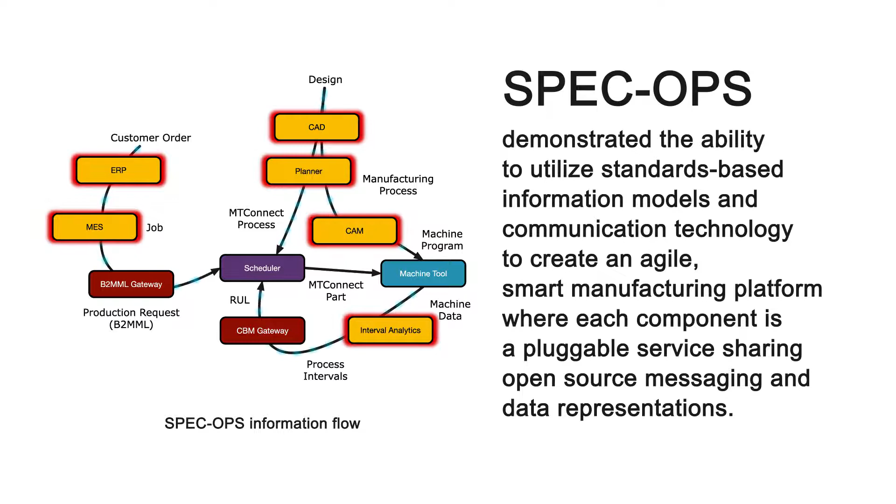utilize standards-based information models and communication technology to create an agile, smart manufacturing platform where each component is a pluggable service sharing open-source messaging and data representations.

Current enterprise resource planning, or ERP, and manufacturing execution software, or MES, provides little to no support for dynamic planning, scheduling, and optimizing equipment utilization. Nor does it support the needs of contract manufacturers as the industry moves towards flexible, agile design and manufacturing services to accommodate a wider variety of customer requirements.

To address the needs of modern manufacturers, the SPEC-OPS team has developed technologies that demonstrate dynamic planning, scheduling, and process analysis to increase agility on the shop floor. The SPEC-OPS standards-based approach uses standards for all communications and information sharing between the various services to allow for pluggable components and a scalable architecture not possible in a vertically integrated proprietary platform.

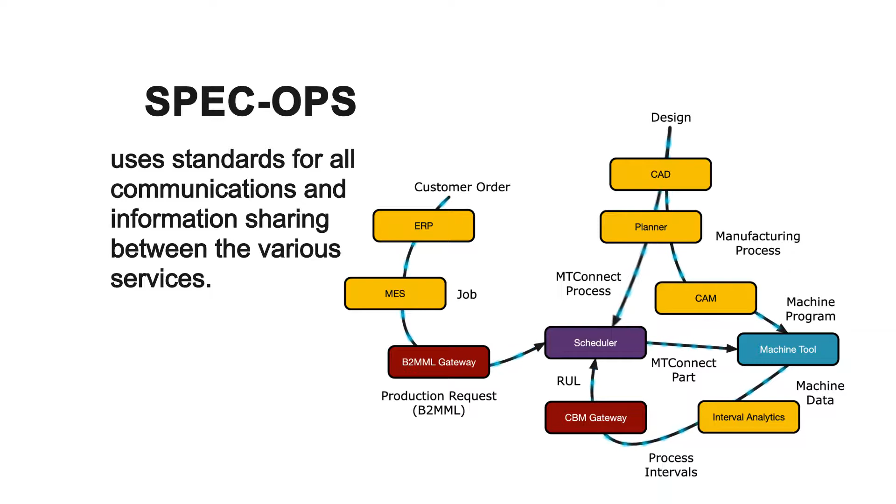SPEC-OPS provides the foundations for manufacturing systems to become self-aware. It allows these systems to dynamically describe themselves and their capabilities, and then track their capabilities during production with real-time feedback to planning and scheduling.

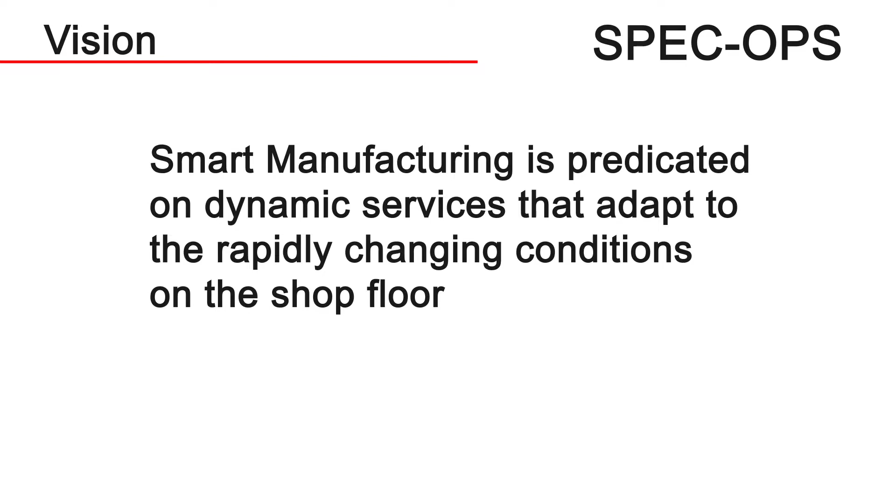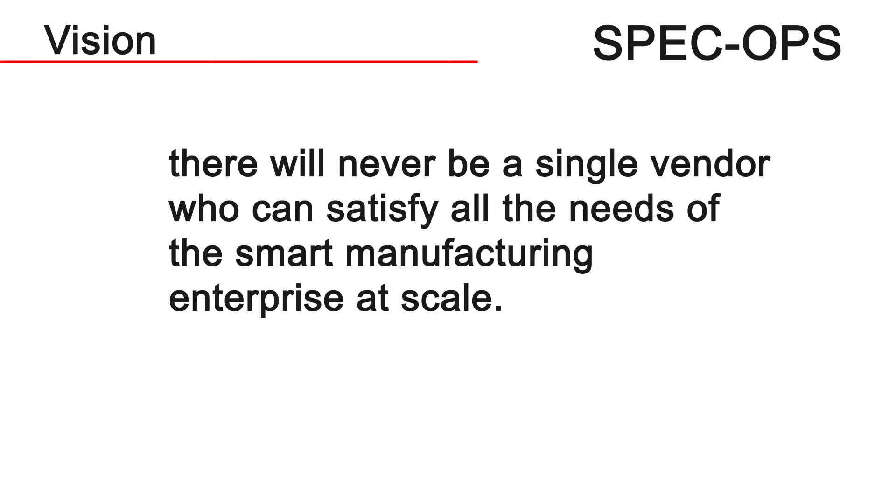Smart manufacturing is predicated on dynamic services that adapt to the rapidly changing conditions on the shop floor and accommodate changes in schedule, priorities, and equipment availability. There will never be a single vendor who can satisfy all the needs of the smart manufacturing enterprise at scale. But multiple companies working in collaboration can supply the components of the right solution at the right price.

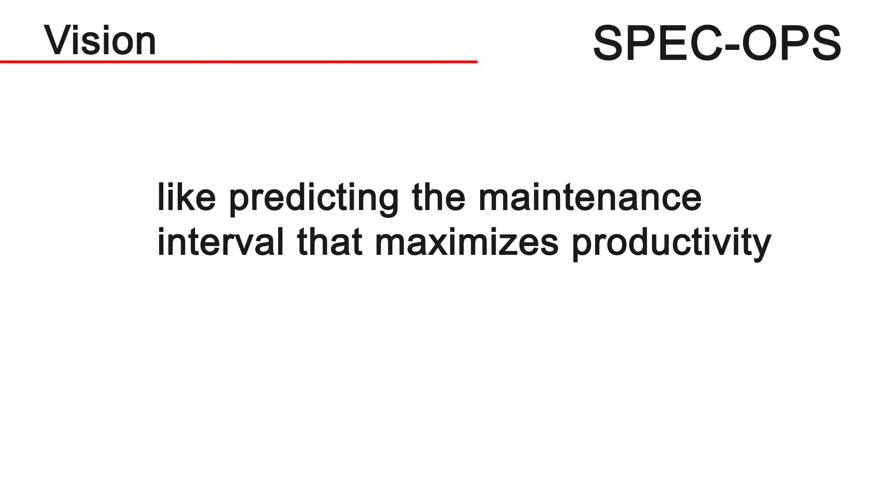Standards allow for the greatest flexibility and choice for the user and prevent vendor lock-in, so the user can always choose the best technology to solve their problems. Standards also allow companies to collaborate to overcome the biggest challenges in manufacturing, like predicting the maintenance interval that maximizes productivity, or provide optimal production routing for a given part given the current set of capabilities available.

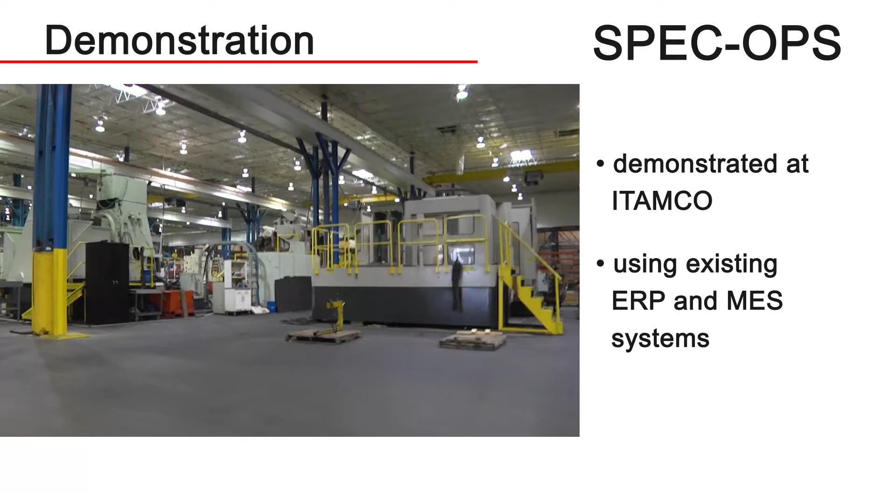Existing ERP and MES systems: when an order arrives at ITAMCO, it is entered into the ERP system, and the material manager creates a matching manufacturing order in the MES system as usual.

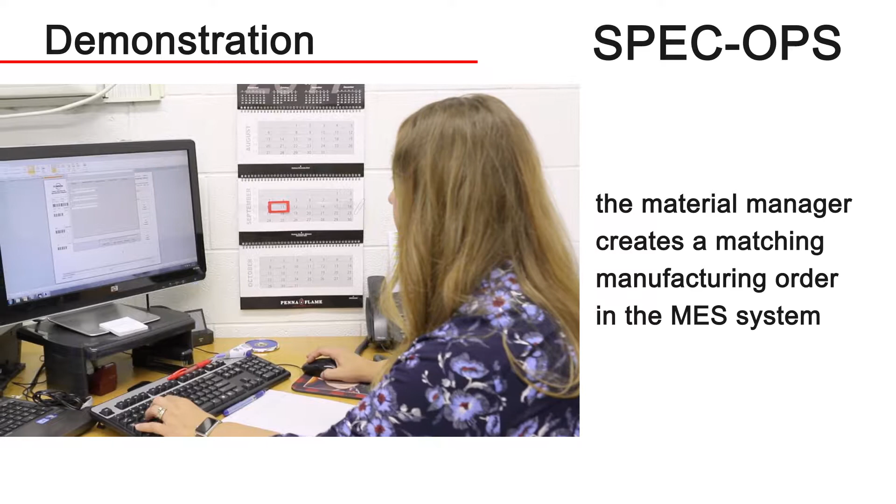The information from the ERP and MES systems is picked up in real time and translated into the XML representation of the ISA 95 Enterprise Control Standard in compliance with the B2MML, Business to Manufacturing Markup Language managed by MESA. This standard is posted to MTConnect, where it is made immediately available to the scheduling, planning, and production systems.

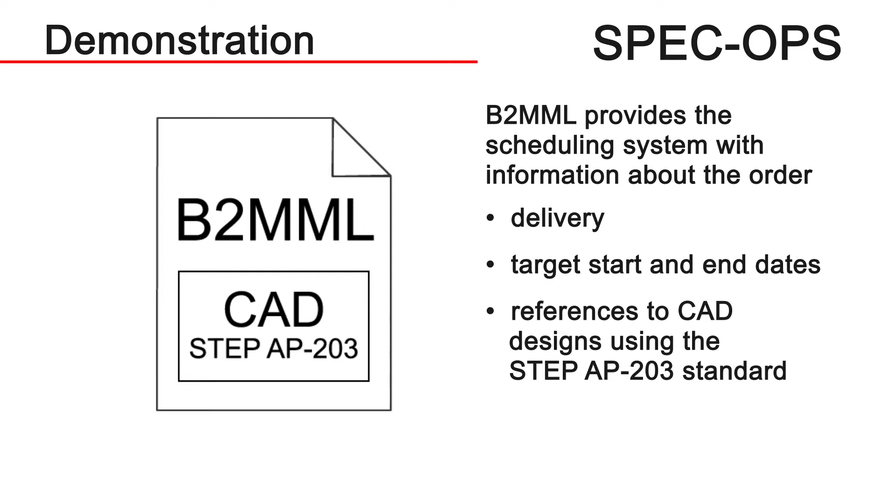B2MML provides the scheduling system with information about the order, including delivery, target start and end dates, references to CAD designs using the STEP AP203 standard, and material requirements.

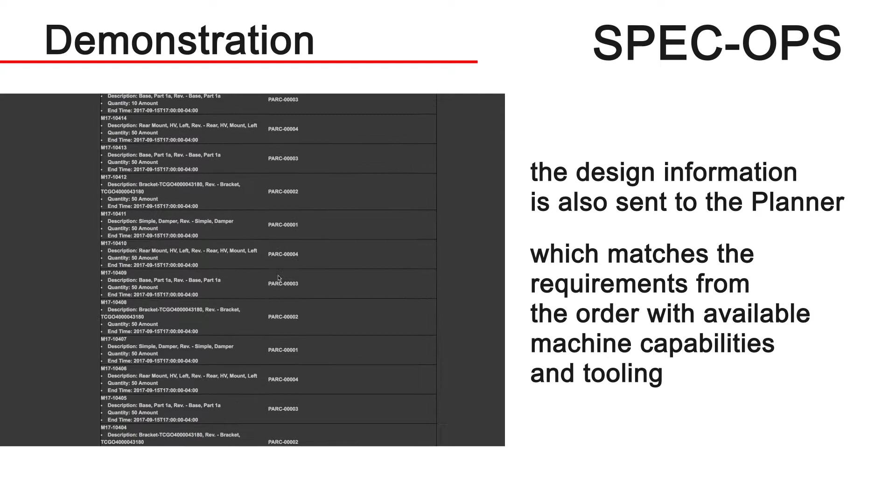The design information is also sent to the planner, which matches the requirements from the order with available machine capabilities and tooling. The planner informs the scheduler about all the possible ways the manufacturing requirements can be met given the equipment. These possibilities are represented in a new MTConnect process information model that provides the routings and process requirements specific to discrete manufacturing.

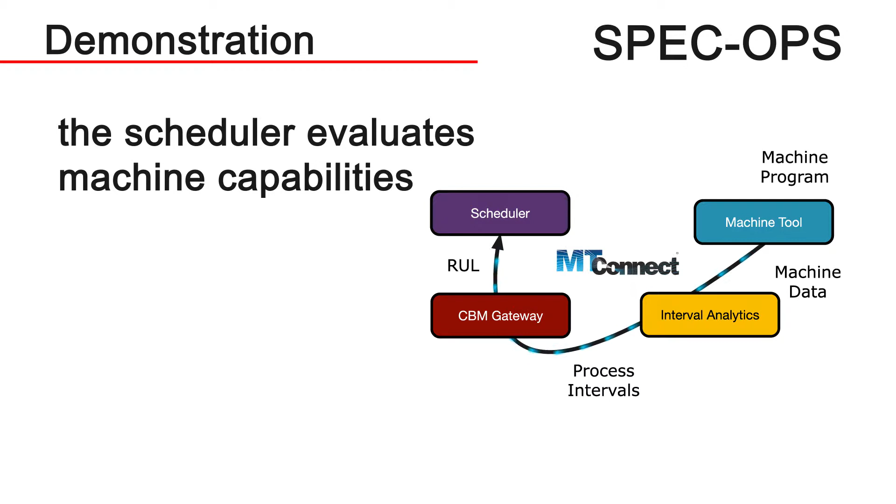The scheduler evaluates the machine capabilities, assessing the current condition and health of every piece of equipment in the shop. For all the orders that must start manufacturing to meet their delivery date, the scheduler also evaluates the alternative ways of manufacturing each part.

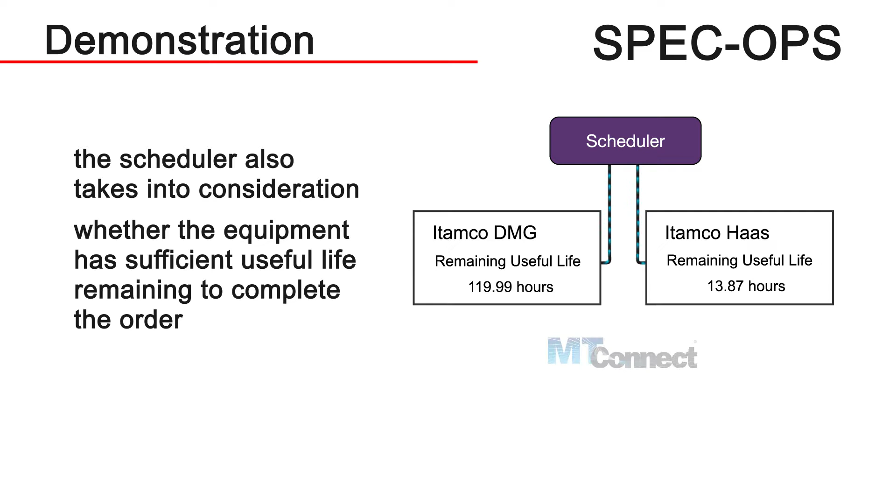Finally, the scheduler also takes into consideration whether the equipment has sufficient useful life remaining to complete the order. The remaining useful life calculations and the representations of the current process plans are represented in the MTConnect standard as well, and are being proposed for the next release of the standard.

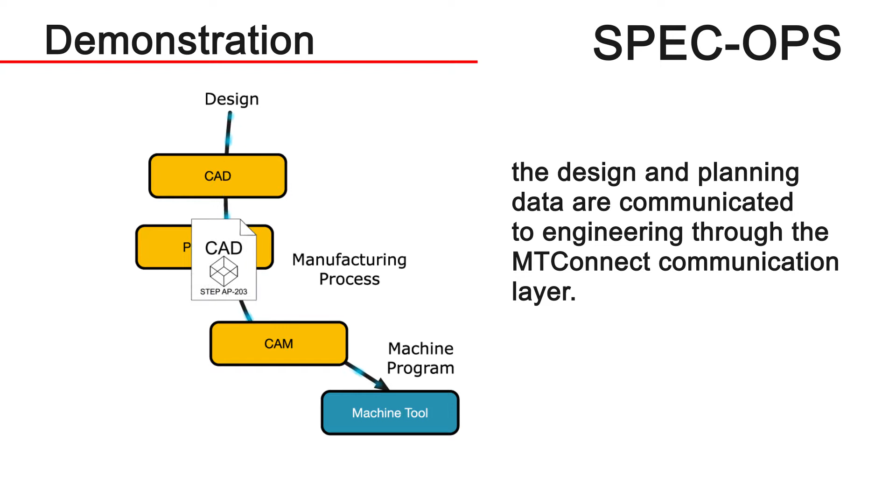The design and planning data are communicated to engineering through the MTConnect communication layer. CNC machine tool instructions, or G-code, are created to satisfy the needs of the manufacturing process as specified by the

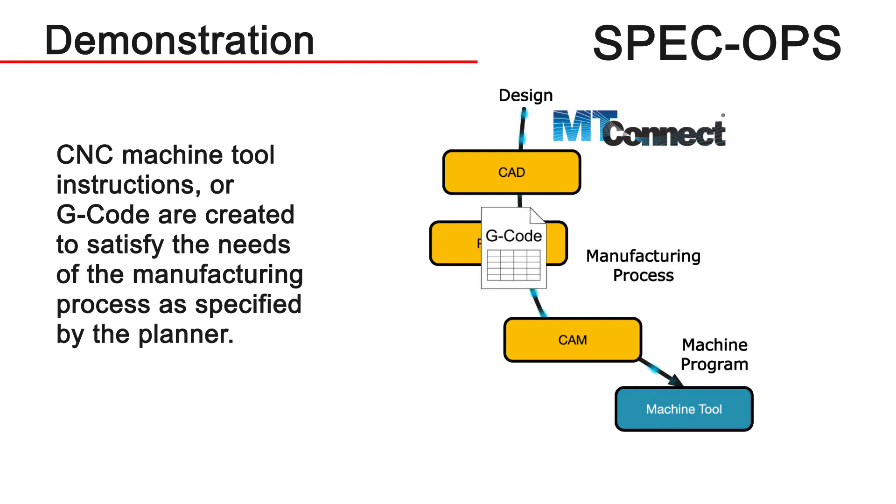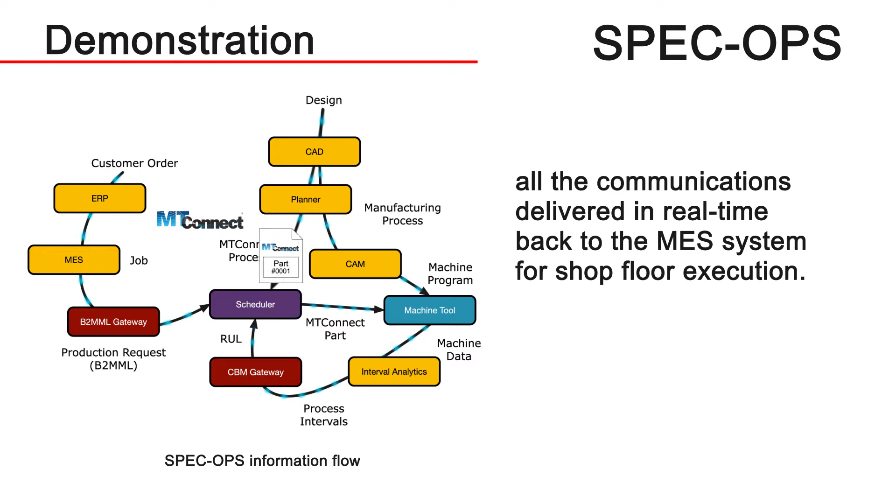planner. The final process information is associated with the MTConnect part, which contains the final routing and schedule, cutting tools, and control programs necessary for production. As with all the communications, this is delivered in real time back to the MES system for shop floor execution.

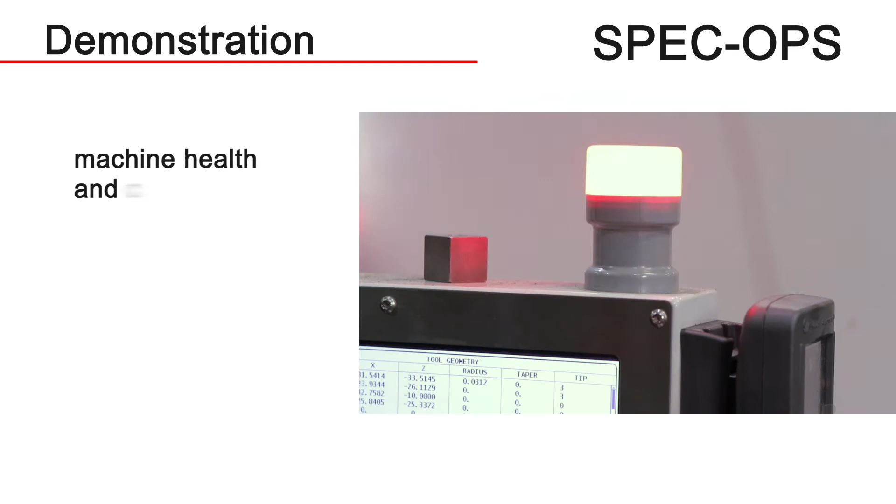Machine health and capabilities to perform certain jobs are determined by process analytics that compute how long the machine is in various states. This data comes with the machine tools through MTConnect.

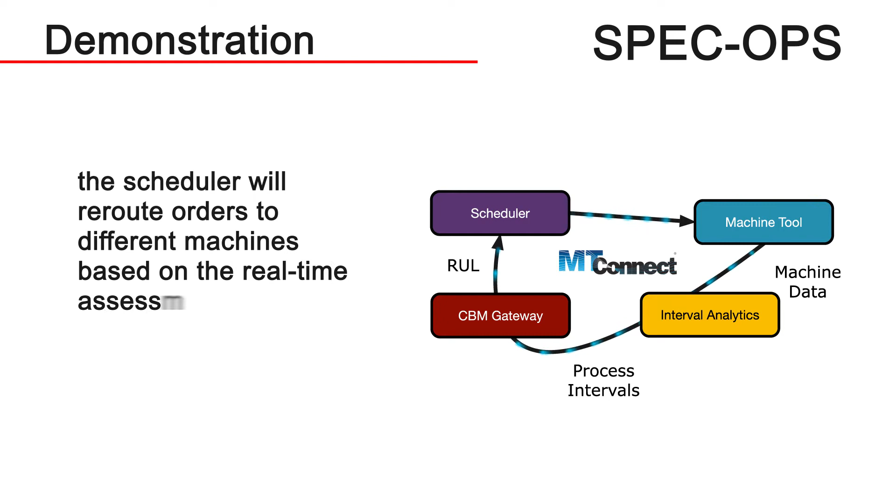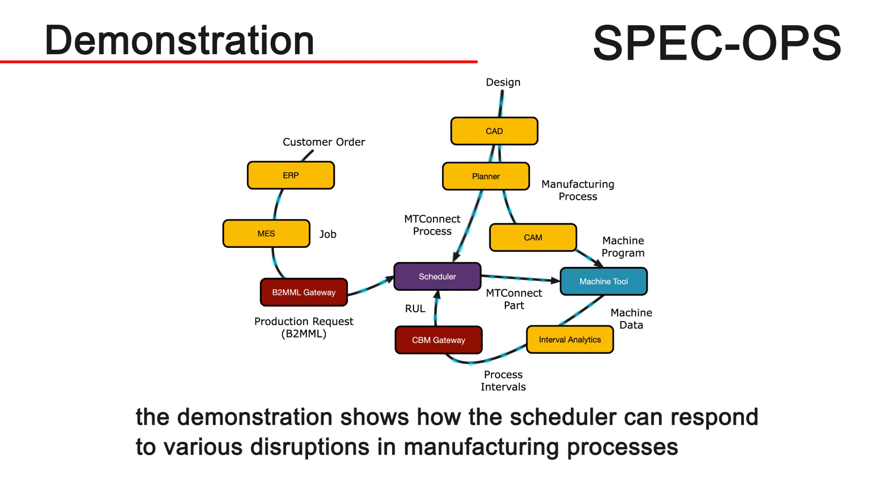The scheduler will then reroute orders to different machines based on the real-time assessment of each piece of equipment. The demonstration shows how the scheduler can respond to various disruptions in manufacturing processes, as well as predictively determine a new set of routings and processes based on the health of the machine.

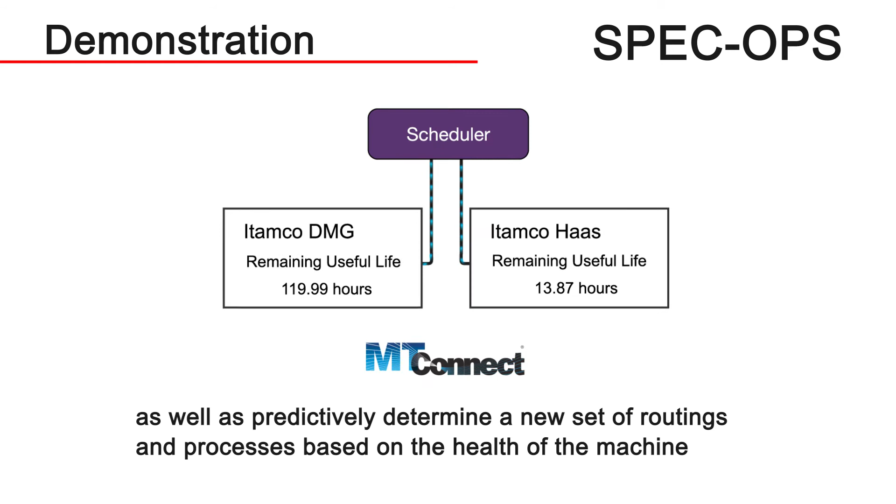SPEC-OPS provides us the foundation for the next generation of standards-based dynamic planning, scheduling, and tracking software. There's still more work to complete all the functionality and develop products based on the platform. But having the standards in place will increase the number of applications available and ease the implementation burden for all parties. The synergistic effect of these technologies will exceed any singular offering or capability and help increase our manufacturing productivity and agility.